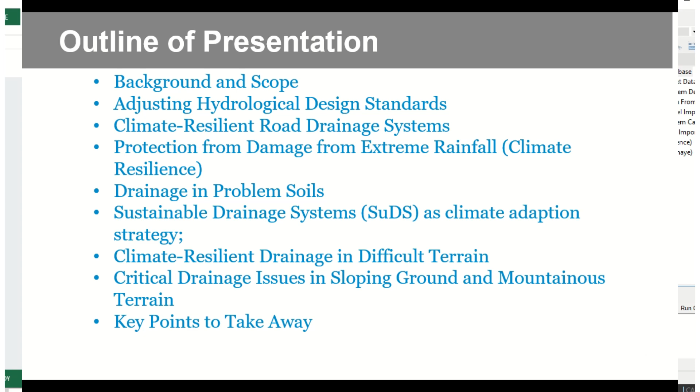The outline of the presentation is as follows: background and scope of the chapter, adjusting hydrological design standards, climate resilient road drainage systems, protection from damage from extreme rainfall, drainage in problem soils, sustainable drainage systems as climate adaptation strategy, climate resilient drainage in difficult terrains, critical drainage issues in sloping and mountainous terrain. And then finally, I will conclude by summarizing the key points to take away.

The failure of the highway pavement can often be linked to poor drainage or drainage system failure. Therefore, before embarking on the pavement design, detailed consideration for drainage provision should be made. The purpose of this chapter is to provide an overview of drainage and climate resilience in order to provide a robust pavement that will perform its function sustainably. Therefore, this chapter does not cover detailed hydrological and hydraulic design, as this can be found in respective country manuals.

The existing Overseas Road Note 31, fourth edition, contained only 2 pages on drainage, and this has been built upon to include information on how to build in climate resilience through drainage. We now move to look at the effects of climate change on pavement design.

Road drainage engineers are accustomed to designing road infrastructure for a specific type of climate. For example, what pipe diameter is necessary for a culvert to function properly, what asphalt will minimize a pavement life cycle cost, how deep must a bridge foundation be to protect it from scour, or from coastal storm surge. All of these questions and many others addressed daily by engineers involve assumptions about the climate of the future.

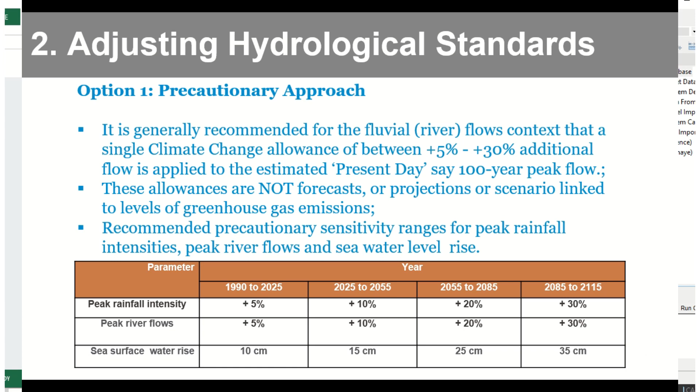Option 2 is making adjustments based on climate change scenarios. The climate projections from selected global circulation model data for low, medium, and high-emission scenarios for the climatic variables are relative to the baseline scenario over the forecast useful life of the pavement drainage system, say for example a 30-year period. Therefore, similar to the precautionary approach, the short-term design, for example operational and drainage structures with a shorter design life, can be taken from the model predicted output for 2050, for medium-term 2080, and for long-term 2110.

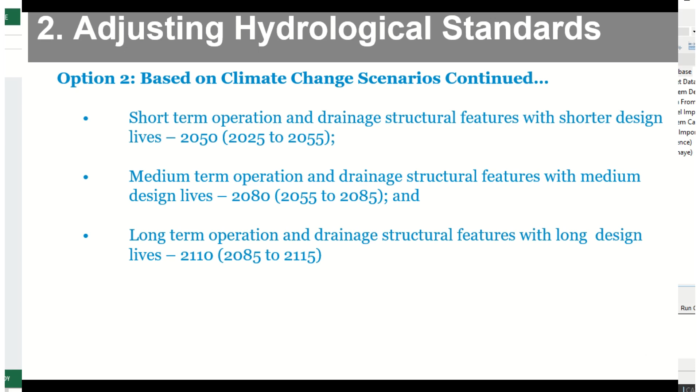A problem with the global models is that they cannot be applied in their current form without being downscaled. Downscaling means converting general circulation model output to regional scales. Global models are intended for use with large spatial scales and are too coarse to determine local scale climate variations in precipitation. For example, the global model divides the world into boxes, say 250 kilometers by 250 kilometers, which is far larger compared to a river basin or catchment basin.

Therefore, downscaling to a regional or local level is required, say increasing the grid resolution to 20 kilometers, or further down to a higher resolution of 12 kilometers or 2.2 kilometers. Downscaling climate data generates locally relevant climate data from the GCMs, the global circulation models. Downscaling captures regional weather phenomena that are influenced, for example, by local topography, land-sea contrast, and small-scale atmospheric features such as convection.

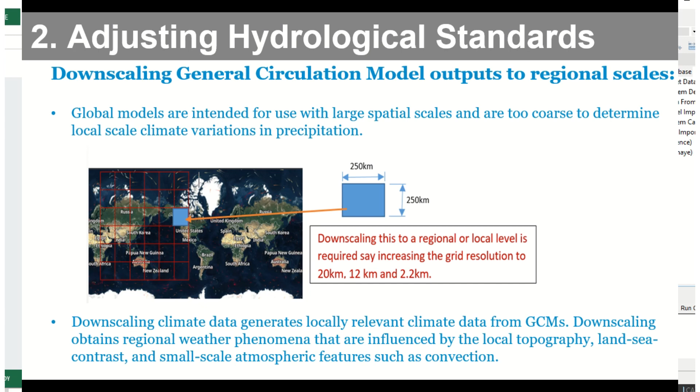Now we move into external or surface water drainage. Surface drainage is a subject quite widely covered in country manuals, hydrology and drainage manuals, and I will be touching on it slightly, as our concern is subsurface drainage.

Moisture is the single most important factor affecting the long-term performance of a pavement, and one of the significant challenges facing pavement designers, who must provide a pavement structure in which the detrimental effects of moisture are mitigated. Hence, the purpose of surface drainage is to keep water away from the road. It includes elements such as side ditches, culverts, mitre drains, pipes, surfacing, shoulders, road cross section, and to some extent the road alignment itself.

Water can ingress into the pavement layers through the surfacing because of oxidative hardening of bituminous layers, cracking of surfaces, joints of modular pavements, cracks in concrete, and weakening of the top layer in high stress zone areas. Water can also ingress into the pavement layers through unsealed shoulders, easily penetrating and weakening materials below the wheel path, which is a high stress zone.

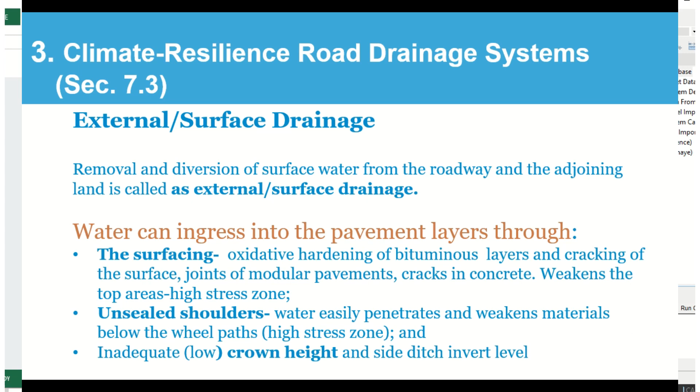Another example in rural roads is the lack of drainage channel or ditch provision, where grass growing on the verge of the road obstructs surface drainage from draining away from the road. This causes water to stand on the road, creating deformation or low bearing capacity, and water can ingress at this location. It is recommended that ditches be provided and the grass be regularly cut or trimmed.

Prevention of surface water ingress requires adequate crown height. These are the measures needed to prevent surface water from ingressing into the pavement layers: adequate crown height and ditch invert level, preventing ingress of moisture from the pavement edges by sealing the shoulders, raising the embankment, and using impermeable seals such as Otta seals and cap seals.

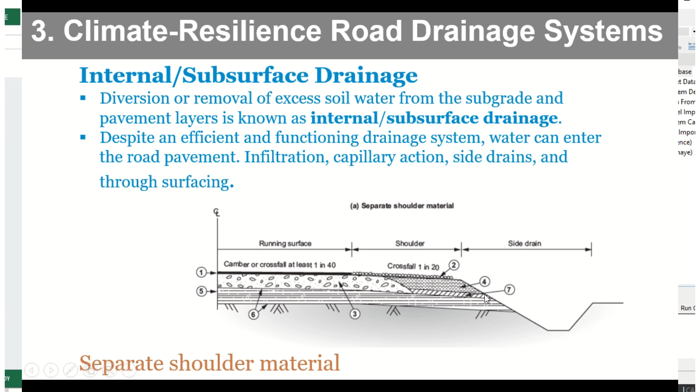Now, to improve internal subsurface drainage, the following actions should be taken: avoid boxed-in or trench type construction, extend the road base and sub-base to the side drains as explained earlier, provide subsurface drainage systems such as French drains, interceptor drains, filter layers or drainage blankets, and prevent permeability inversion.

Now, one of the most significant climate impacts is that we are witnessing washout of pavements on a regular basis quite frequently. A washout is the result of a combination of flood and erosion, so this is about protection from damage from extreme rainfall.

Erosion, the other cause of washout, can also be related to blocked drains due to poor maintenance, as well as inadequate drainage capacity for extreme events, which can lead to washouts. Extreme rainfall events can cause washouts to occur more frequently as they generally entail a heavy downpour of rain within a short period. Sea level rise will result in coastal flooding being more extreme due to higher base levels, increased salinity of coastal river waters with related impacts on salt-sensitive structures, and increased sedimentation in tidal areas.

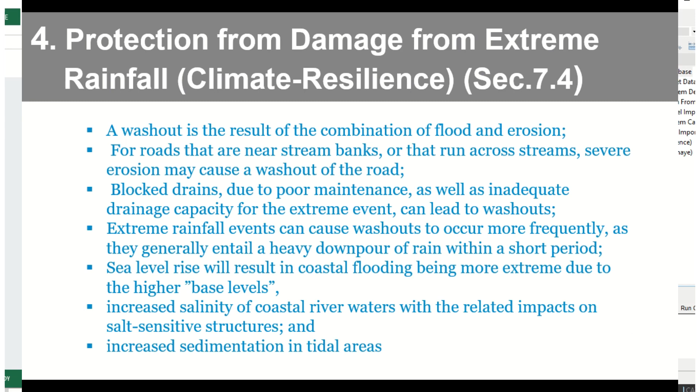Extreme events can cause washout and inundation. We need to distinguish between inundation and washout in order to select the type of material we use as a climate resilient measure.

A rapid flow of flood water, with high current, scours and washes out the pavement structure. This mechanism has very little impact depending on pavement type. However, in an inundation, where a rise of water submerges the pavement with no rapid flow or current, pavement type has an impact, whether it is bitumen or concrete pavement.

Now I'll show you a video clip which shows a culvert being washed out due to an extreme event in real life.

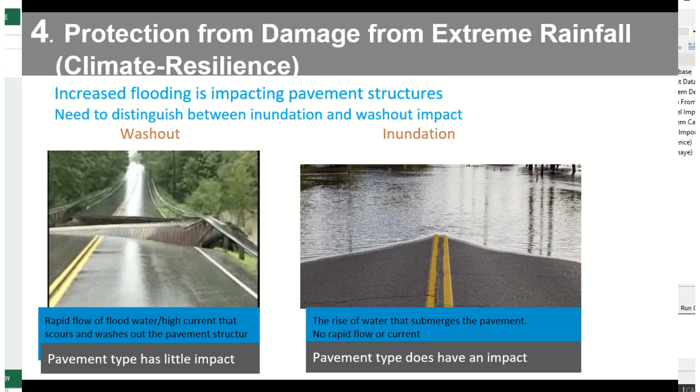Here you go. We don't want to be in this situation, so we need to protect against such scenarios.

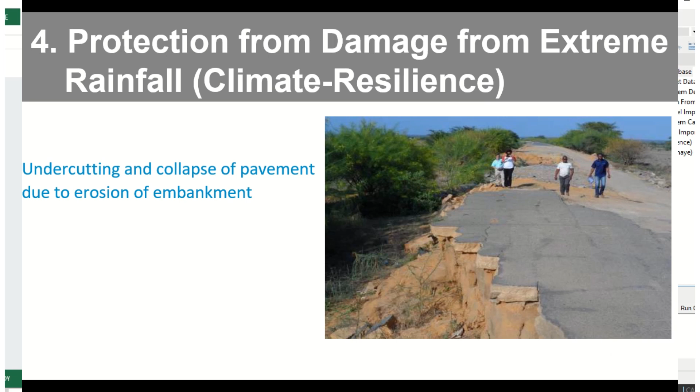This is another example of a road which has undergone undercutting and collapse of the pavement due to erosion of an embankment.

Now, these are some extreme event mitigation measures: undertake site-specific flood risk assessment, because we need to understand the mechanisms of failure in order to provide a workable, sustainable mitigation measure. Early assessment of climate change in the design process is very critical.

For example, different disciplines like engineers, climate scientists, hydrologists, geologists, and stakeholders have to work together, not individually.

Applying a safety factor, for example freeboard, is also one measure, considering a long return period for exceptional events when designing hydraulic structures. For example, if the design standard is 1 in 50, we can now design it for 1 in 100 years. Using waterproof materials for new designs, or treating them to make them waterproof.

Reducing the gradient of slopes and taking into account the materials used. Designing for future flexibility, for example leaving extra space for future drainage structures like culverts, is also important.

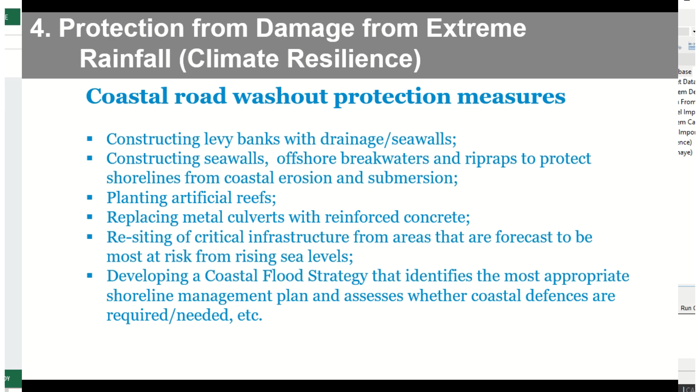Developing a coastal flood strategy, which is a soft measure, identifies the most appropriate shoreline management plan and assesses whether coastal defenses are required and needed.

Building new roads, especially on greenfield sites, although drainage in problem soils is a geotechnical issue, drainage also has a vital role to play. Improving drainage in problem soils is very important.

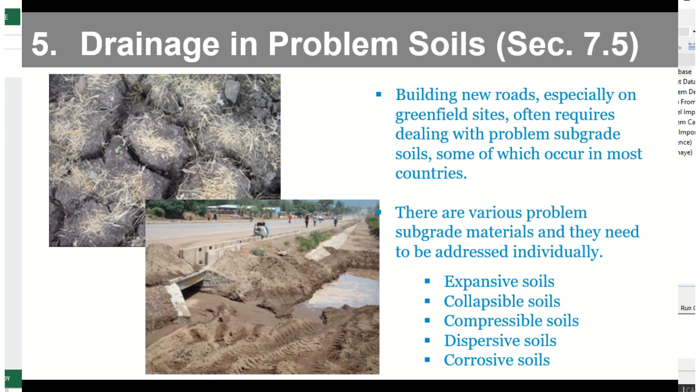Building new roads, especially on greenfield sites, often requires dealing with problem subgrade soils, some of which occur in most countries. There are various problem subgrade materials, and they need to be addressed individually, for example expansive soils, collapsible soils, compressible soils, dispersive soils, and corrosive soils.

There are traditional remedial measures which include pre-wetting, for example 2 to 3 months, to induce equilibrium moisture content before constructing the pavement.

Countermeasures include partially or completely removing the expansive soil, replacing it with non-expansive material, or modifying and stabilizing the expansive soil with lime to change its properties, since lime stabilization reduces permeability, helps keep moisture out, and maintains a high level of strength and stiffness even when saturated.

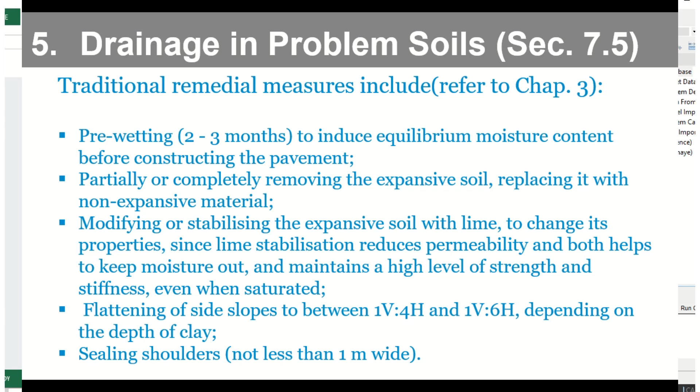Also, flattening of the side slopes to between 1 in 4 and 1 in 6, depending on the depth of the clay, can also help. Sealing shoulders not less than 1 meter wide is also very important.

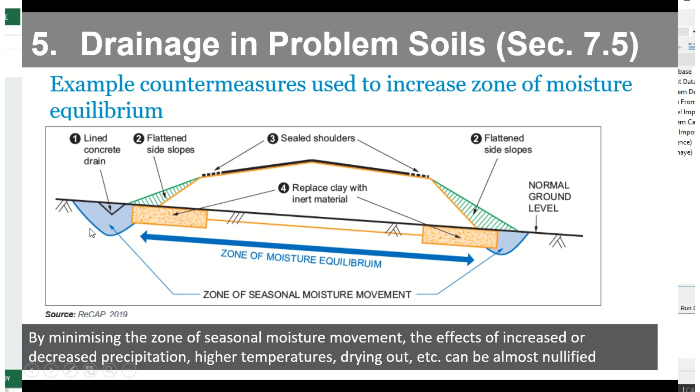This diagram shows the zone of moisture equilibrium and the zone of seasonal moisture movements. So the countermeasures, for example, we can flatten the side slope as seen in number 2, seal the shoulders and replace clay with inert materials as shown in number 4, and then provide lined concrete drains on both sides of the road.

Now we move on to sustainable drainage systems. The traditional drainage principle is to get rid of water from the road pavement and its surrounding areas with little regard to the damage it causes to the receiving water body or environment, erosion, or arable land.

Unfortunately, this often results in heightened peak runoff volumes and increases in erosion and pollution problems in natural rivers and streams. Therefore, good road drainage design should consider not just the removal of runoff water, but also maintenance of sensitive environment, public health, natural water resources, and the effectiveness of future maintenance activities.

Sustainable drainage system designs are drainage solutions that provide an alternative to direct channeling of surface water via lined channels through networks of pipes and sewers to nearby water courses. Therefore, the sustainable drainage system of a road is the approach to manage surface water that takes account of water quantity (flooding), water quality (pollution), biodiversity, wildlife and plants, and amenity, collectively referred to as sustainable drainage systems.

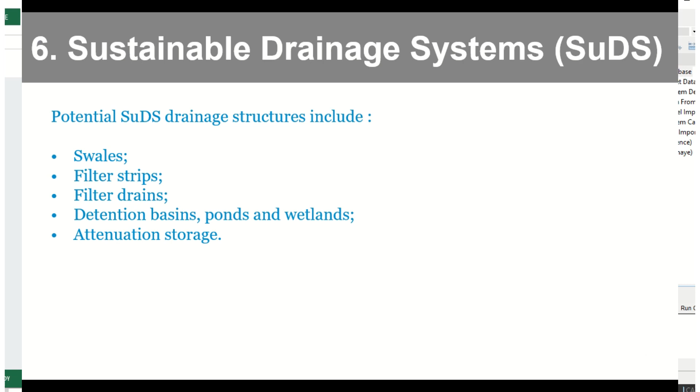But swales and filter strips can be implemented quite easily as they do not take that much land. This is an example of a grass swale. People might ask what is the difference between the swale and the traditional grass channel.

Well, the swales have a base permeable layer with huge voids. They can store water and percolate into the ground, or they can also trap pollutants and improve the water quality. So it has a dual purpose: flood reduction and pollution control.

As seen here, they can provide scour checks at regular intervals, and the water can be slowed down, infiltrated, and the pollutants stopped. Therefore, we can make the environment more sustainable, reduce pollution, and protect the road from flooding.

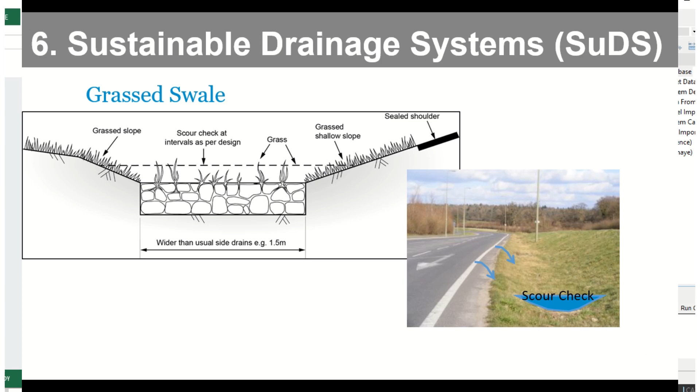This is an infiltration basin. Again, it works on the same principle but on a greater scale. If you look at the cross section here, there is an infiltration material, the grass, and then the water can be stored, pollutants trapped, and when the peak flow passes, the water can outflow to the downstream water body as clean water and in a controlled manner.

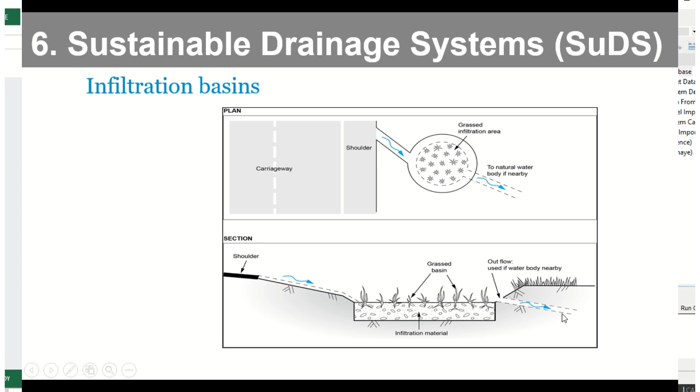Now we move into climate-resilient drainage in difficult terrains. Drainage of road pavements in sloping, flat, and low-lying valleys often poses a problem, and it's a design issue that requires sound guidance for practitioners and road authorities.

The following are critical drainage issues that need to be considered in flat and low-lying areas. Quite a considerable amount of information has been included in the updated Road Note 31 guidance document.

It is common for the entire catchment, for example around the road, to be inundated with water during the rainy season. In flat terrain, where obtaining a minimum drainage gradient may not be possible, water flow at the outlet of a culvert may also be constrained by downstream flow restrictions.

Drainage water may also cross private land. This can be a legal issue in some countries, especially if it is agricultural land.

Before the construction of the road in a flat floodplain, the flow is distributed across the land. But when you put an embankment and allow the water to flow through a certain location through a culvert, the water is concentrated in one location. It creates a gully downstream and causes problems. So some sort of distributor needs to be considered.

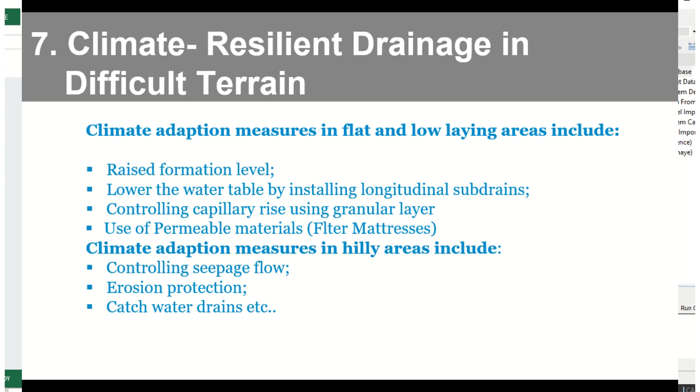Some of the mitigation or adaptation measures in flat and low-lying areas include raising the formation level of the road, lowering the water table by installing longitudinal sub-drains, controlling capillary rise using a granular layer especially if you have high groundwater level, and using permeable materials like filter mattresses. Climate adaptation measures in hilly areas also include controlling seepage flow, which is the main problem, erosion protection due to slope, and catch water drains.

These are some additional measures in flat and low-lying areas. Once the road is constructed, many of the problems in these areas are quite difficult to solve. Therefore, they need to be considered at the initial stages of design. Good drainage design begins with good road location. Hence, if possible, it is important to avoid frequently flooded areas and unnecessary stream crossings, which will greatly reduce maintenance cost.

If this is not possible, the following countermeasures should be considered: raising the formation level and protecting the embankment with, for example, mortar riprap upstream and concrete downstream, along with a drain/stilling basin.

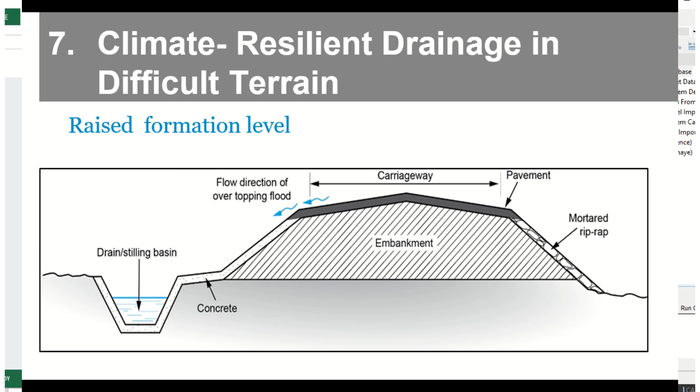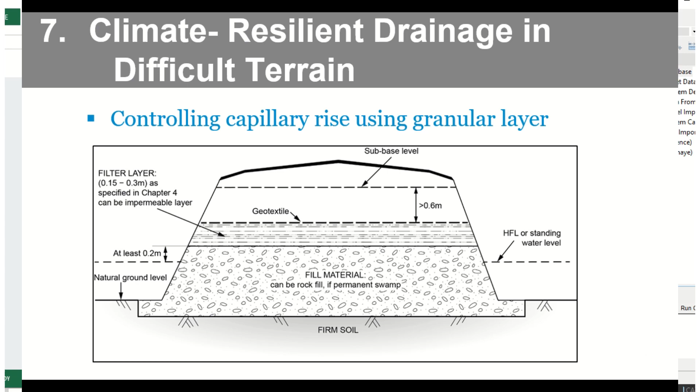If you have a high groundwater level or are passing through swamp areas, controlling capillary rise using a granular layer is very important. For example, the fill material can be rock fill if it's a permanent swamp, and the granular material should be positioned at least 200 millimeters above the high water level and greater than 60 centimeters below the sub-base layer. The thickness of the filter layer can be between 150 to 300 millimeters, as specified in chapter 4. Therefore, it is very critical to control capillary rise using granular materials.

When both the ground surface and impervious layers slope toward the road, seepage flow is likely to reach the road surface. If the vertical distance between the surface grade and the seepage level is less than 60 to 90 centimeters, we need to construct subsurface drains to prevent seepage flow from entering the subgrade.

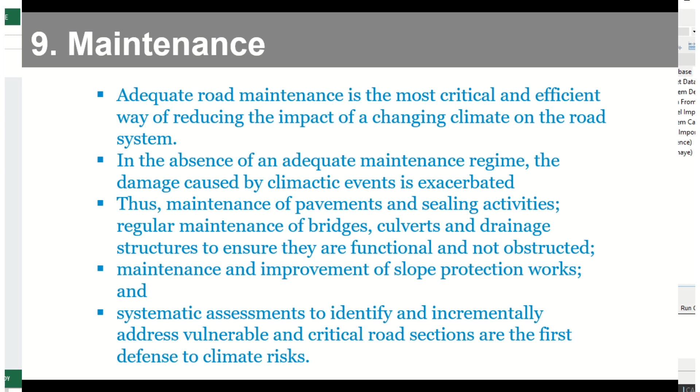Maintenance and improvement of slope protection works, and systematic assessment to identify and incrementally address vulnerable and critical road sections, are the first defense against climate risks.

Now, finally, the key takeaway is that highway pavements or geometrics, surface drainage, non-pavement internal subsurface drainage, climate, and soil properties all have a significant impact on the drainage system and need to be studied and considered.

Consider adjusting hydrological design standards in order to make your pavement more climate resilient. Consider implementing SUDS (sustainable urban drainage systems) for climate adaptation to reduce both flood quantity and improve water quality. Special attention is required for drainage of problem soils and difficult terrains. A resilient drainage system with adequate capacity to cater for increased flows is critical for the integrity and performance of road infrastructure due to extreme rainfall events.

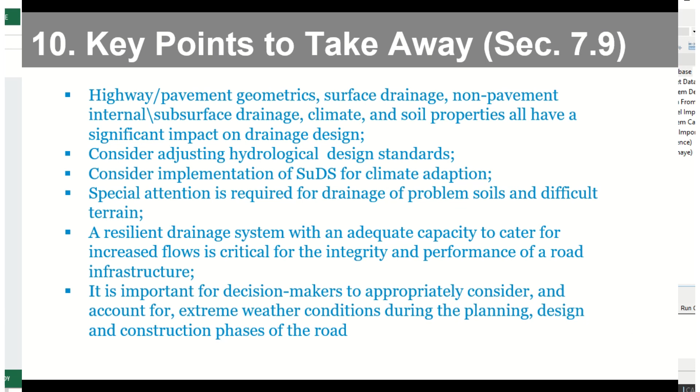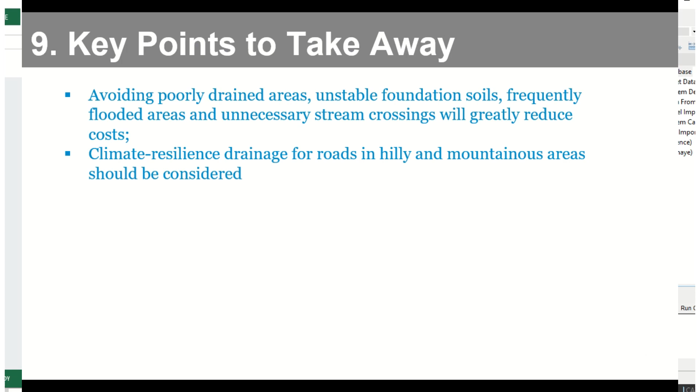It is important for decision makers to appropriately consider and account for extreme weather conditions during the planning, design, and construction phases of road pavements. Avoiding poorly drained areas, unstable foundation soils, frequently flooded areas, and unnecessary stream crossings will greatly reduce future operation and maintenance costs. Climate resilient drainage for roads in hilly and mountain areas should also be considered. Thank you for listening.